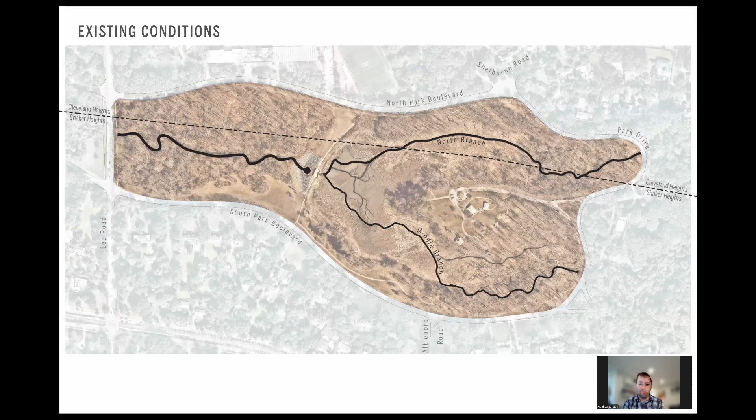On the next slide is our overall project tree inventory. This is new information we received early on in the 30% design process, and it's been an invaluable tool for us to take all of this data and start to manipulate our design to maximize saving of healthy mature trees, and to identify locations of invasive and dead trees on the project.

This pie chart on the bottom left identifies a series of tree species deployed throughout the park. A couple of the highlighted ones on the bottom right of your screen are identified there as well. Overall, about 3,000 trees were inventoried as part of this project.

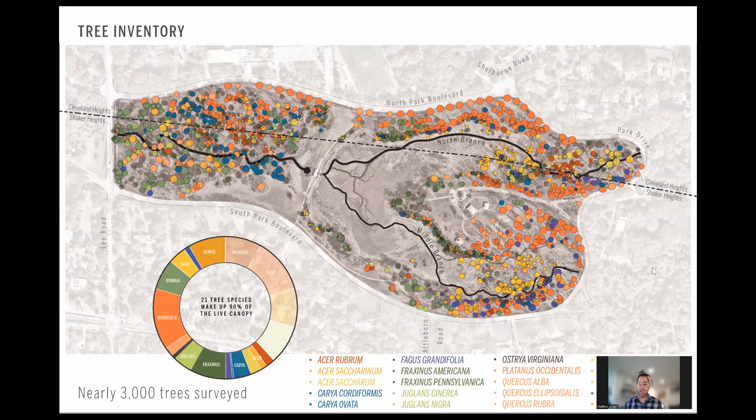We were also able to identify, with the tree inventory data, what we're calling legacy trees. Legacy trees account for just under 10% of all trees in the park. We've defined legacy trees as trees of good genus or species that are also larger than 36-inch diameter—really massive, majestic trees on the site. We want to make sure we're doing everything we can to protect these trees during and after construction.

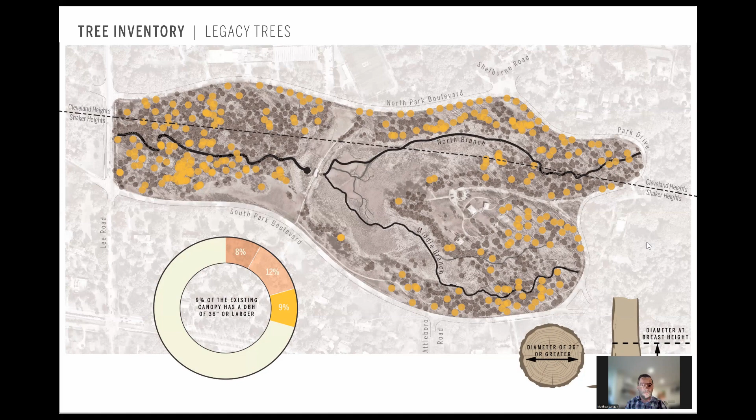Understanding the tree inventory and where all the important trees are, we've taken a pass at realigning the stream alignments to make sure we're protecting as many of those legacy trees as possible, while also aiming at some of the invasive trees so we can wipe out those invasive tree clusters as we're restoring the streams throughout the impoundment area.

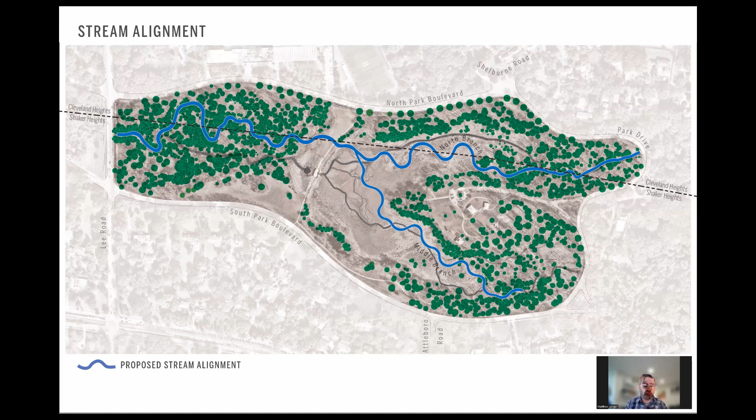To enable that stream restoration process, in the alignment highlighted here in blue, there's a vast area of earthwork that needs to be done. In this area highlighted in red, this is effectively the limit of regrading that has to happen on the project, because there are hundreds of thousands of cubic yards of sediment in the old lake bed.

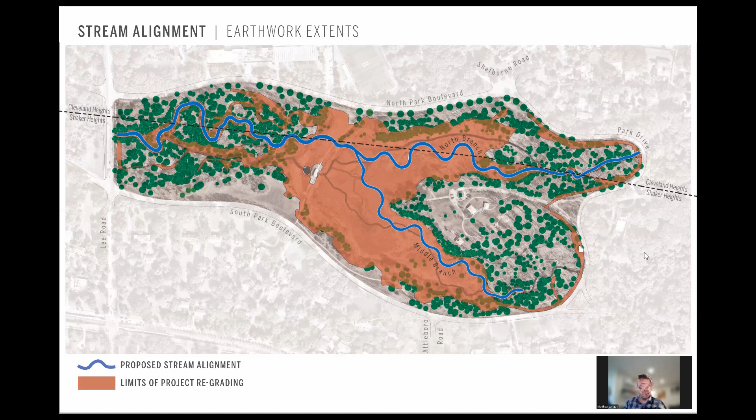There's also the earthen embankment of the old dam that has to be partially removed to allow the stream to pass through it down towards Lee Road. So you can see this is a pretty vast area, and it's going to require quite a bit of manipulation—it's also going to require a series of tree removals.

If you remember the slide showing the invasive or dead trees, most of those were along the edges of the old lake and in that downstream area. Our regrading opportunity here is to take advantage of removing a lot of that invasive plant material as part of the regrading efforts, and try to manipulate and get rid of that seed bank of invasive seed and roots along those edges of the old lake.

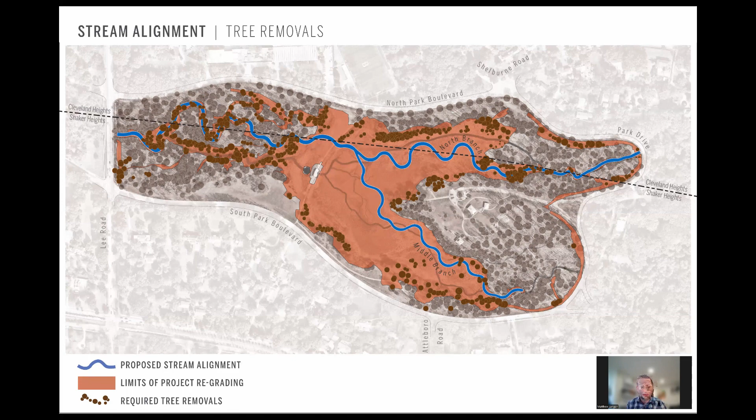That will allow us to take all of that sediment highlighted in the red zone, scoop it up, and relocate it on site to these areas now highlighted in orange. That will let us create a series of new landforms in the park that create high points, giving park users great views down into the floodplain in all directions. It'll also be an opportunity to create vertical circulation from the upland boulevards down and across the floodplain and back up the other side, reconnecting the two communities together.

So these landforms are going to be a mixture of soil that is relocated on the site, and sediment that has been amended and replaced as structural fill to enable the park circulation and park amenities you'll see in a little bit.

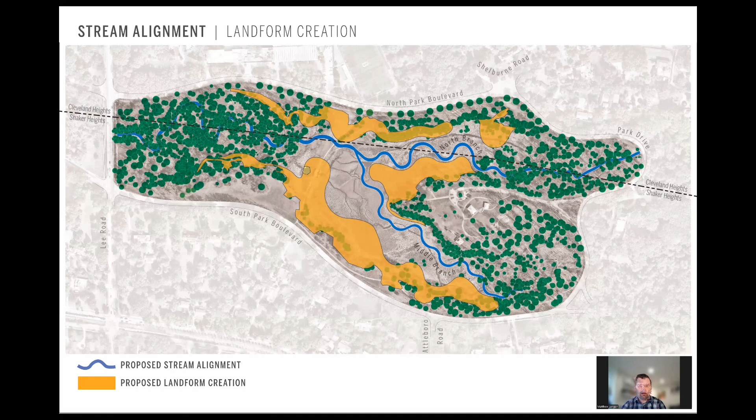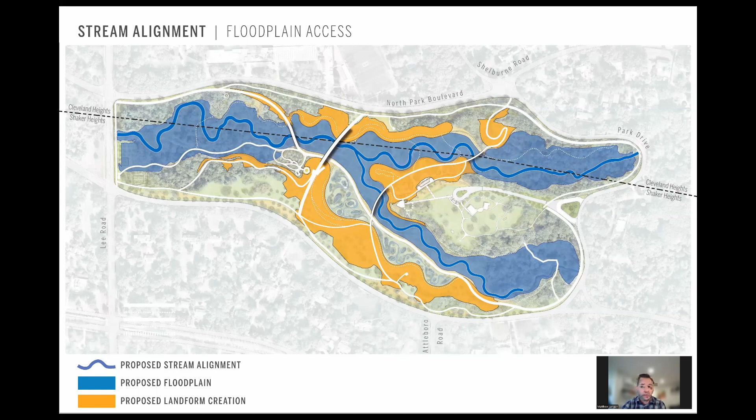The circulation highlighted here in white is exactly that—using these landforms to create the access we think will be necessary for a successful park.

That allowed us to create a hierarchy of potential park circulation throughout the park using a series of colored lines, identifying primary, secondary, and tertiary circulation. This means we want to create a variety of opportunities for park users to access and use the park in different ways for different experiences. The primary and secondary circulation will all be paved paths throughout the park, whereas the tertiary circulation will include things like lawn paths and dirt trails, similar to some of the trails used today inside the park.

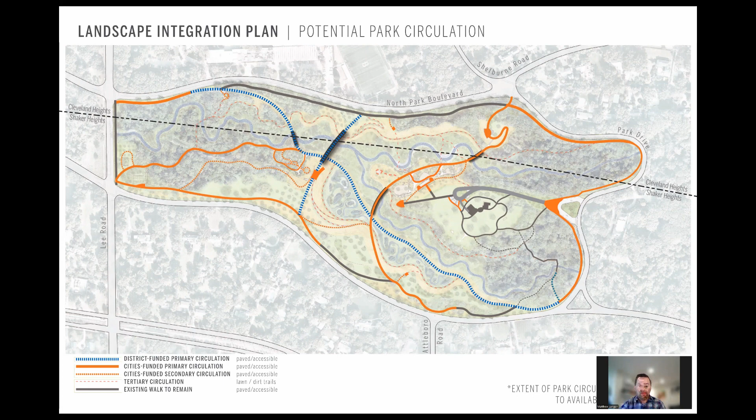And so that brings us to our landscape integration plan, which highlights all of those elements of stream function that we just talked about. But it also starts to illustrate how we've overlaid the circulation system and a whole range of park amenities on top of all of that regraded earth on the project. We're going to walk you through a little bit more about the park amenities, but before we do, we want to reiterate the point about how important stream function and park hydrology is to the project.

So we're going to dive into that now, and I'll call your attention to the north and middle branches of Doan Brook as they come through the park and confluence right in the middle of the park and then continue on downstream to Lee Road. You can see that generally the width of that stream is about 20 feet wide and is fairly continuous all the way down from Park Drive to Lee Road.

But as we start to look at what happens during a typical summer rain shower, you can see that the stream corridor gets a little bit wider and the stream comes up out of its banks and starts to spread out a little bit. You can also see a whole series of squiggly lines along the edges of the park. Those are a series of constructed wetlands that we'll talk more about in just a minute, but they also take on water from the adjacent neighborhoods, and I'll show you that in just a second. So if I toggle back and forth here for a second, you can see that even in a small summer rain shower, which is anything less than an inch of rain in a 24-hour period, really starts to change the way the stream looks, even after a small rain event.

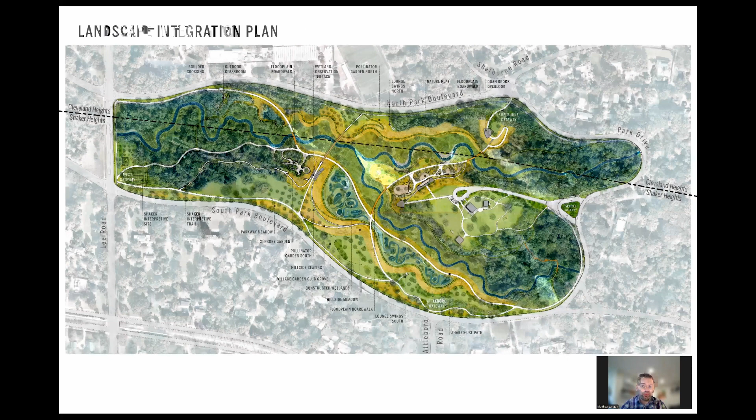And when we get larger rain events, the changes are much more dynamic. You'll see that here as I go forward to what we're calling a one-year storm event. A one-year storm event is just under 2 inches of rain in a 24-hour period. And what you can see here, again, if I toggle back and forth between a typical summer rain shower and a one-year storm, is a much broader stream corridor where that stream is accessing much more of the floodplain.

And this is all by design. This is intentionally designed to allow that water in the stream to come out of its banks and access this vast floodplain, to slow that water down and store that water as it's slowly draining westward under Lee Road and out towards Lake Erie. Again, on the edges, you can see a series of wetlands that are starting to get hydrated by storm events as well.

As we jump ahead to the 10-year storm, again, you could see the footprint of the floodplain swelling with more water. That water is moving nice and slow and is as shallow as possible, again by design, to make sure that we're slowing this water down as it's passing through the park site.

And then even in a 100-year storm event, which is the biggest storm event that we're designing for, you can see the entire floodplain has been submerged now, but the major park circulation, the arteries of circulation through the park, are still accessible, and our proposed boardwalks and bridges are still above the water level. Again, that's by design to ensure that the park can be used even during a major storm event like a 100-year storm.

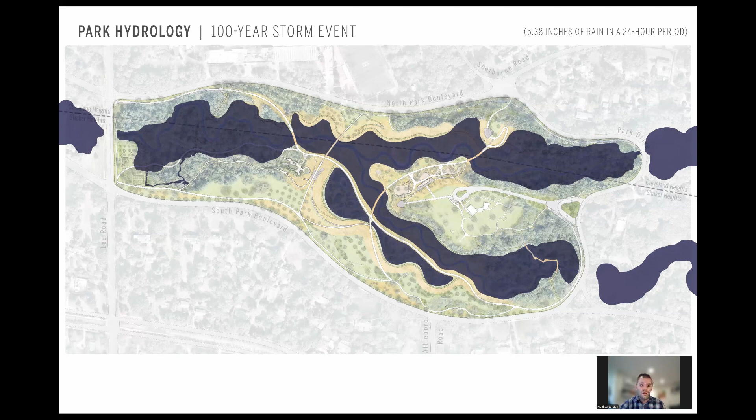And so to put that into perspective, here you can see a diagram of some of the major potential park circulation on the site. This is a bird's eye view, kind of hovering over Lee Road, looking east. You can see the Beaumont School off to the left there and South Park Boulevard off to the right.

Here you can see 3 of the main circulation spines through the park. The first one is the shared use path, the shared pedestrian and bicycle pathway that cuts diagonally right through the park.

There's also the mid-park crossing. The mid-park crossing is the footprint of the old sidewalk that took you across the dam between North and South Park Boulevard. That will be reconstructed, and a major piece of it, right where it says mid-park crossing there, will be a pedestrian bridge that continues to make that connection across the new stream corridor between North Park and South Park Boulevard.

And then in the background, you can see what we're calling the Attleboro-Shelburne Trail. The Attleboro-Shelburne Trail is a physical connection between the terminus of Attleboro Road along South Park down into the floodplain, across the floodplain, and back up to Shelburne Road on the Cleveland Heights side of the project.

What's exciting about this circulation network is that it will be open to the public even during major storm events, as you can see here. These trails are designed to stay high and dry, allowing floodwater from the stream to pass right underneath them as it continues its way out to Lake Erie.

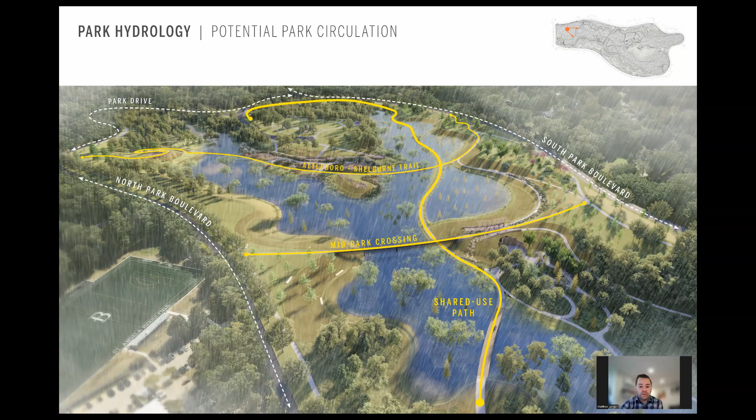You can also see on the right-hand side of the shared use path a series of lobed areas that are also taking on stormwater. That's one of our many constructed wetlands in the project, and we're going to talk about those now.

A major component of our park hydrology, which is separated almost entirely from the stream system, is a series of wetland filters we've been designing to intercept stormwater coming from the adjacent neighborhoods and filter it before it ultimately delivers filtered water back into the Doan Brook corridor.

There are 4 major wetland systems currently being designed. Wetland 1, on the center bottom of the slide, has a drainage area of nearly 90 acres of Shaker Heights, continuing south to Woodland Road and east to Eaton Road. All that stormwater collected from the streets currently outlets directly into the middle branch of Doan Brook today. We're going to intercept that water as it comes into the park site and put it into this 3-lobed wetland system.

A little further west along South Park Boulevard is Wetland 2, with almost a 10-acre drainage area—mostly the properties along South Park Boulevard just west of Attleboro Road. All that stormwater will be captured into a small wetland system highlighted in orange on the far west side of the site, letting that water get filtered before it makes its way back into Doan Brook.

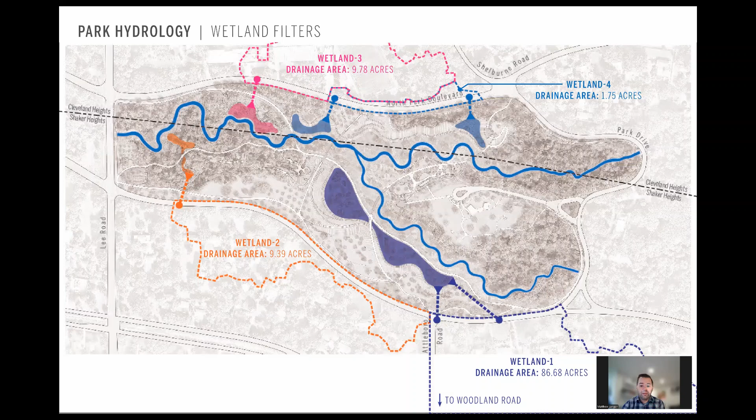To give you a sense of what this might look like in the park, we're going to look at Wetland 1, that series of 3 lobes along South Park Boulevard. You can see that here on the screen, along with the shared use path dividing Wetland 1 from the middle branch of Doan Brook, that line coming through.

This has been designed as an entirely separate water system from the Doan Brook system, intentionally, because we want to take all the stormwater coming off the streets and run it through this wetland system to filter that water out before we ultimately bring it back to Doan Brook.

We're going to look at those same storm events we looked at earlier in plan view and see how they start to hydrate these wetlands. During a typical summer rain shower—about 1 inch of rain in a 24-hour period—you can see the wetland starts to get hydrated in this long swale, which is normally dry, but after a rain event the water starts to flow through and deliver water into all the lobes of the wetland.

As we jump ahead to the 1-year storm event, you can see some of the low areas of the wetlands start to get inundated with small pools and pockets of water.

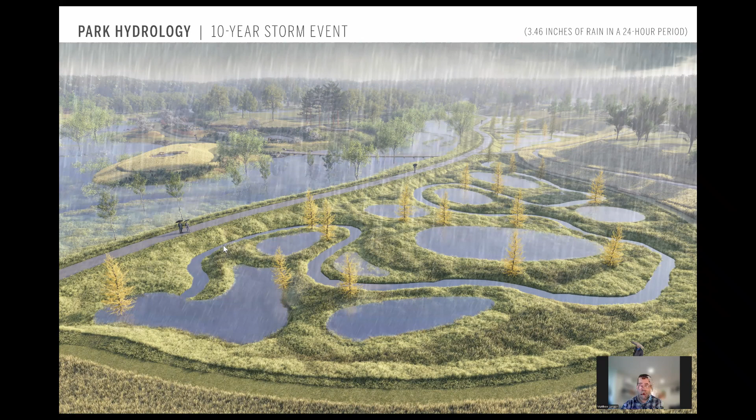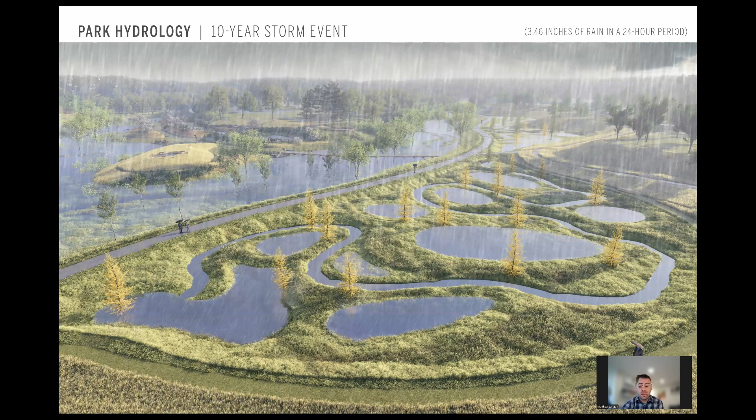In a larger 10-year storm event, those little pockets of water grow into these big oblong pools, which take that water and really let it sit there and get filtered before it starts to recede back into that swale and ultimately out into Doan Brook.

In the 100-year storm event, the entire wetland system is completely inundated, and that water is detained and filtered before going through a controlled outlet underneath the shared use path back into Doan Brook. This allows storm water coming through the Doan Brook system to pass through the culvert under Lee Road and down towards the nature center and beyond, before we outlet the water from the wetland system back into Doan Brook.

Coming back to the landscape integration plan, you can see how we've designed the park to function hydrologically as our primary objective, but also use the stream restoration process and landform creation to set the table for a whole lot of other things, including circulation and park amenities.

With that, I'm going to turn it over to my colleague, Glen Valentine, to walk you through the different types of landscapes you'll be able to observe and encounter in the park through our circulation network. Glen will take you on a tour of all the park amenities we've designed into the project to date.

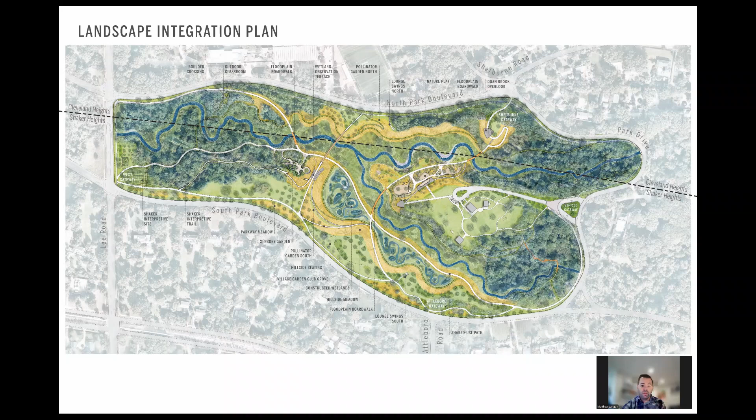Thanks, Matt, for that explanation of hydrology and circulation in the park and how we've manipulated all of that landform and sediment to make those two systems function.

Flowing up from that, we're designing a series of meadows which transition from the stream floodplain and stream valley to the parklands along each side of the parkway. That whole yellow area you see are those sloping meadows of the hillsides.

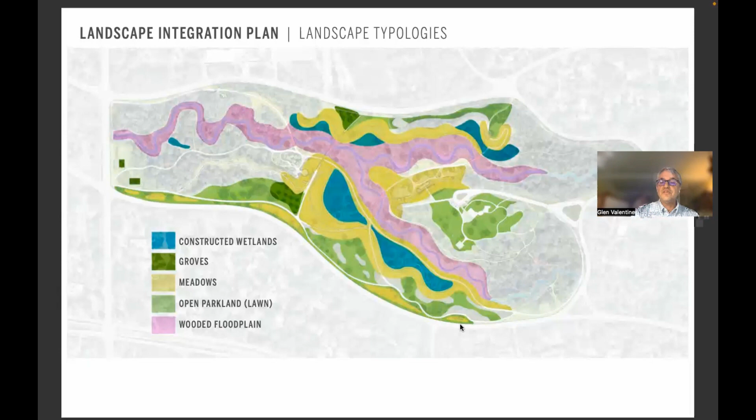Up at the top, we're designing new open parklands along the north and south sides of the park using large collections of native species, both in canopy trees, shrubs, and ground covers. In some areas along South Park in particular, we're thinking of using meadows along that edge too to reduce the amount of mowing needed in that landscape.

We're going to take a look at each one of these environments in turn as we tour through the park, and we'll look at the amenities as well. But to start out, we're going to look at the restored stream corridor itself.

It's really designed to accommodate all of those different activities through the middle of the park and provides a way for most people to experience the restored water system along almost its entire length, whether you walk, stroll, or go along it in any manner you choose.

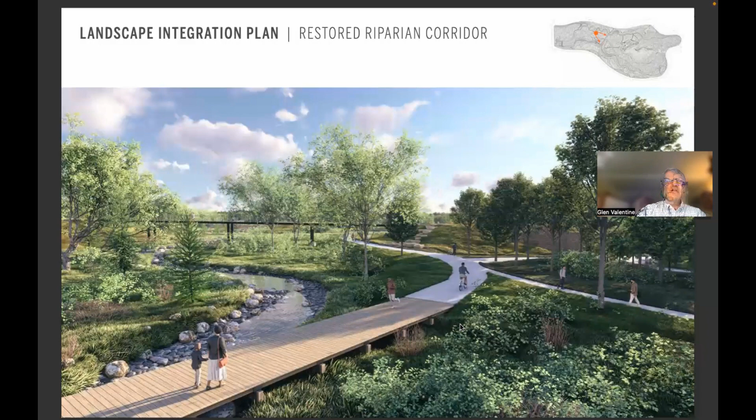Now we're going to continue our tour through the restored stream corridor.

We've designed a series of different ways for people to interact with the restored brook itself. This is one of the things we heard most loudly in our public engagements throughout the process of designing this park: that people wanted to get down to the level of the water and really engage with the restored brook.

Here you can see the outside meander of a portion of the Doan Brook, where the armoring, these boulders along that edge, has been manipulated to create a series of informal steps to allow people to get down from the level of the adjacent pathways to the level of the water itself. This particular spot, shown on the key plan, is along the north branch, right next to the area of nature play, which we'll get into later in this presentation.

And it allows parents and kids to get down to the level of the water. We've also designed other ways for people to interact with the brook.

You can see in the foreground of this image a child walking across an informal bridge made out of stepping stones or boulders crossing the brook, creating the beginning of one of many riffles throughout the restored Doan Brook. On the inside meander, you can see a shelf of gravel accessible by this series of stepping stones.

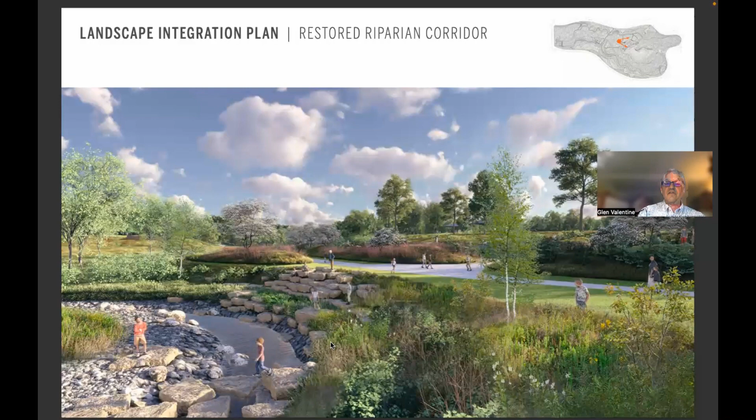The other thing I want to talk about here is the element of the planting itself and how it's going to change over time. As Matt mentioned, the hydrology of the park is very dynamic, and many of the spaces will change with each storm that comes through the created wetlands and through the floodplain of the restored Doan Brook.

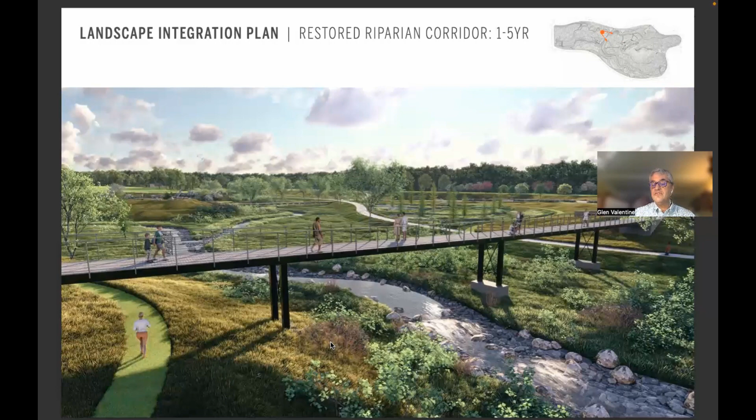But that's going to change with time. Here we've gone fast forward into the future 20 years, and you can see that the shrub layer has grown up to about 10 or 12 feet high, which will be its mature height. It will be quite dense at this stage and rich, creating a lot of habitats for birds and other animals along the length of the corridor.

You can also see pioneer tree species jumping up here - trembling aspen, cottonwoods, willows, birches, all kinds of fast-growing pioneer trees. They'll reach up to a height of about 35 feet by this time, really transforming the experience from the bridge and from the ground, and the whole feeling of the restored Doan Brook.

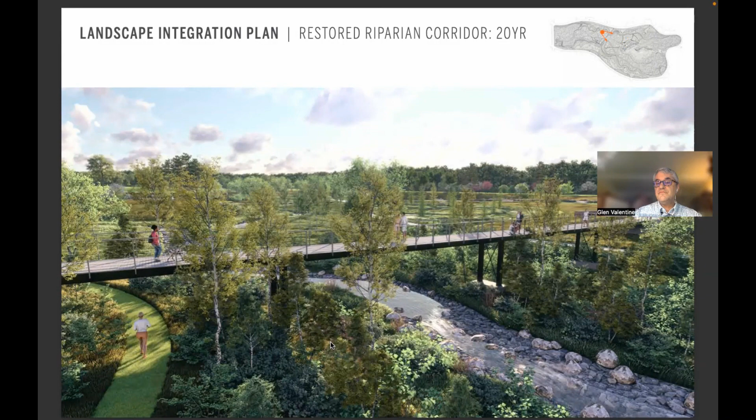You can see it transforming towards more of a woodland character as opposed to an open kind of marshland. We're going to jump forward again. Here you see what this portion of the park might look like 40 years in the future - you can see how much it's transformed. The canopy trees here have reached up above those pioneer species and closed a canopy over the stream corridor itself.

That will create a new level of shade and will outcompete many of those pioneer species, those fast-growing trees, and those initial sun-loving shrub communities will diminish. Some will go away completely, and you'll have a transformed ground plane of native perennials and ferns, as you see here, and the open kind of views you have from the ground plane will be restored in a way, but in a very new kind of environment below the canopy of trees.

You can see here the hardwood trees have reached up into the sky. These are what we imagine might be shagbark hickory on the left or sycamores on the right. And you can see the experience from the bridge.

This is the same view, just transformed by time, where you have these open long views to the east and the west. Now you're still going to have views down into the stream valley, but your experience is going to be completely transformed into one where walking on this bridge will be like walking on a canopy walk through the tops of these trees.

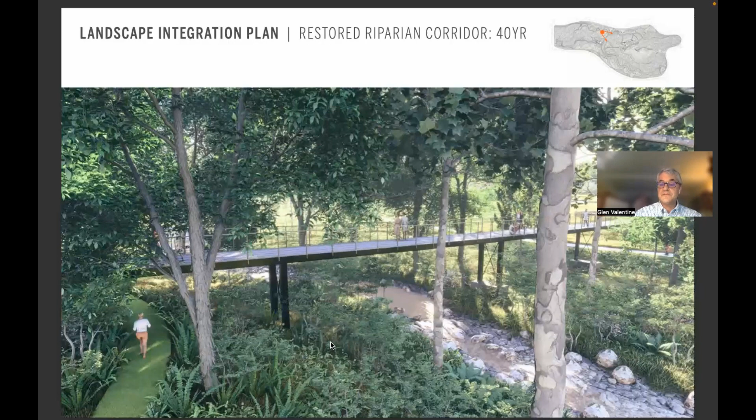Now we're going to take a look at that circulation system that Matt was mentioning earlier, describing the system throughout the park, and look at the gateways as they meet the adjacent communities along both the north side and the south side of the park.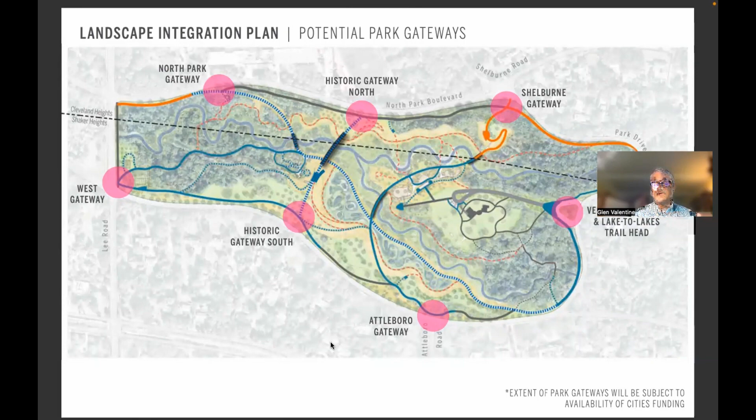As Matt mentioned, there's comprehensive circulation through the park that is designed to function even in the largest storm events. These pink dots around the perimeter are the potential gateways where those circulation systems integrate with the adjacent communities. Each one has been designed with a suite of amenities, including benches, signage, trash receptacles, and bike racks, to be as welcoming and inviting as possible to all the communities surrounding the restored brook and the new park space.

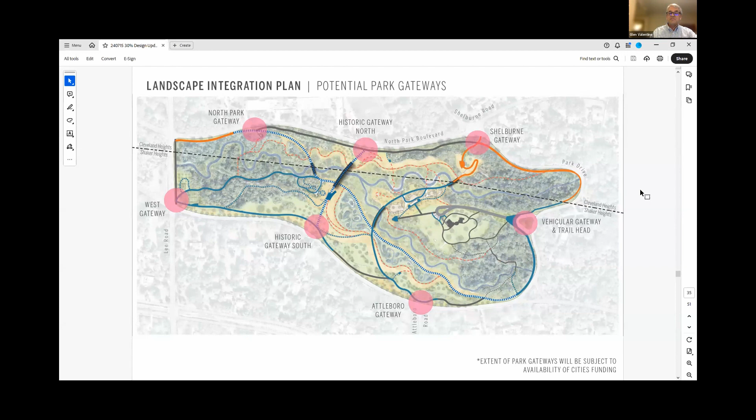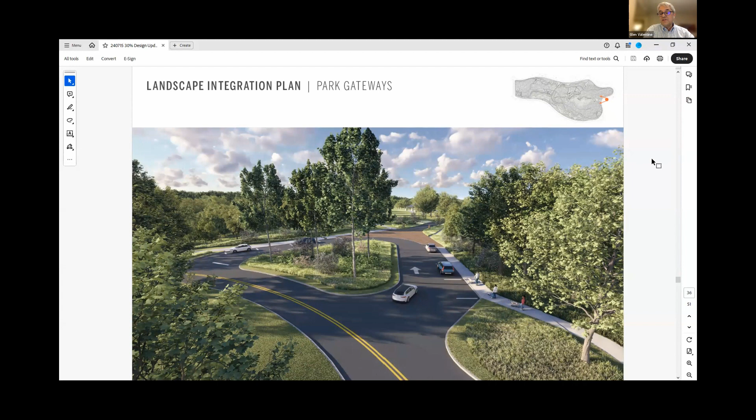We're going to look at a couple of these gateways now. Here's the transformation of the existing entry to Horseshoe Lake Park. We've envisioned the native planting stretching out, reaching around this existing space, enveloping people coming to the park and creating a clear separation between pedestrian and vehicular environments. You can see a new plaza formed in the middle center of this slide. Those brown pavers will have a low mountable curb to make it very clear where the cars stop and where the pedestrian strolling experience begins through the existing Horseshoe Lake Park.

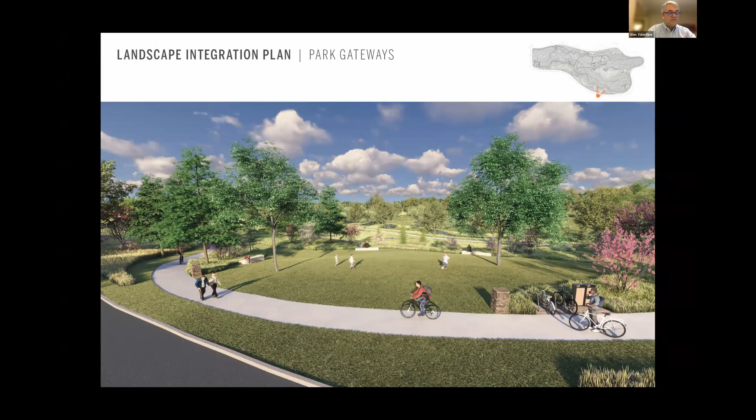Here's a more typical kind of gateway that you're going to experience around the perimeter of the park. This is at the intersection of Attleboro and South Park Boulevard, shown by that little red arrow on the bottom part of the key plan. Here you see some of the key elements: bike racks, trash receptacles, two little entry piers where we're going to have signage about the history and identity of the park, and a series of benches throughout the space.

The one key thing about each of these gateways is that you're going to open up vistas into the park, encouraging people to come in and explore the center of the park, which has never been open to them before. We're envisioning these as little mini parks for informal gatherings and play for all of the communities around the Doan Brook Park.

Next, we're going to take a look at the integration of potential park amenities. We're going to take a tour of these amenities, starting from the east and moving to the west. These are the amenities that really came to the fore in our previous public engagement activities, where there was a voting and design exercise to decide which of these were most important to the design of the park.

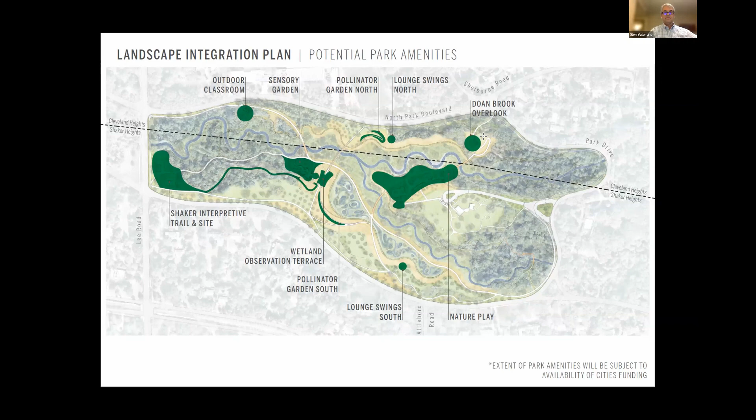We're going to start with the Doan Brook Overlook. This is located at the highest point in the park, a new overlook built on one of these promontories that Matt was talking about, with the sediment stored here giving long views along the North Branch looking to the west. In the distance, you'll be able to see nature play from this location. The low seat walls here relate to the historic masonry walls that exist right now in Horseshoe Lake Park. We envision hillside, informal seating, kind of an outdoor amphitheater that can be used for gatherings and maybe even impromptu community performances at this location.

At the center of the park, along the North Branch, looking at that little red arrow for orientation, this is an overview of the nature play, one of the largest amenities in the restored park. You can see here that it's divided into three distinct sections or areas of play.

On the far left-hand side will be an area for swings enclosed by planted mounds. In the middle of nature play will be an area with climbing structures. Further to the east, or the right-hand side, there'll be an area for slides set into the hillside. You can also see here how the North Branch of the Doan Brook intersects this nature play area.

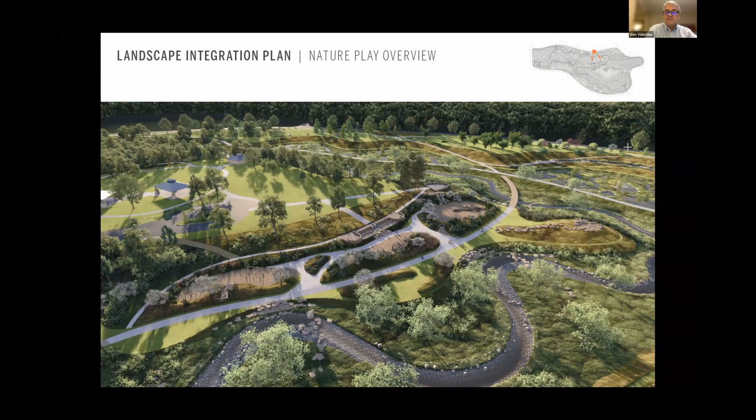As I discussed earlier, we really want this to be a place for engagement with the restored brook. We see these two places where the meanders touch nature play as a critical part of the nature play experience in the park.

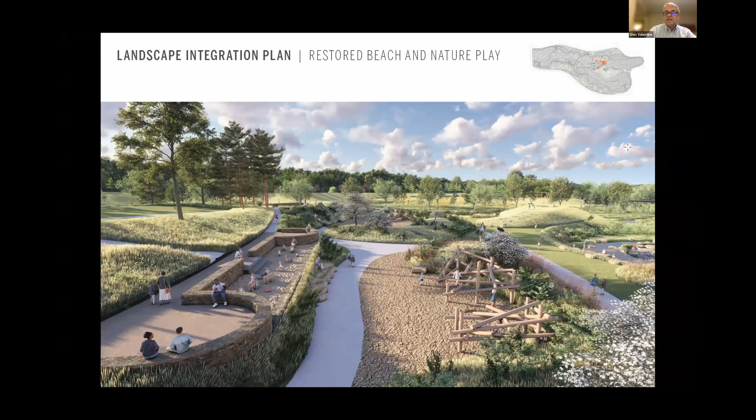Here we are zooming in, you can see a little more detail of the nature play design area. You can see those mounds I mentioned, heavily planted to create separation of the distinct areas within nature play. This is the central area, with climbing structures envisioned from all natural materials on the right. On the left, the area known as the beach has been transformed into an area for sand play, really for the youngest kids and visitors to this part of the park.

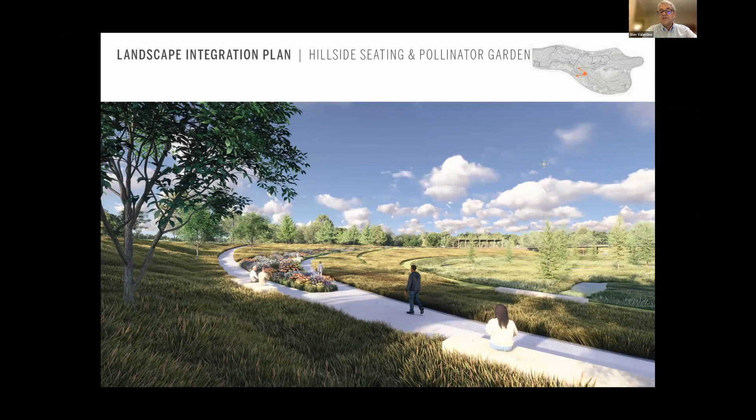And here you see the pollinator garden in the center of the image with those flowers in bloom, running along the central path of this sloping meadow hillside area. In the background, in the center of the screen, you can see an arbor up on the hillside—that's an overlook arbor, which we'll take a look at in just a second.

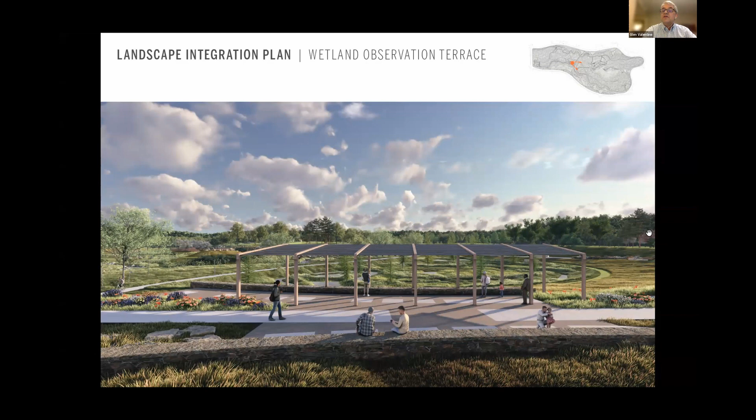So here's that arbor. You're up on the landform that was the former dam, close to the center, right before the bridge—you can see where that is from the red arrow on the key plan above. This is looking back over the constructed wetland from above, and you can see we've created a welcoming, pleasant place for people to sit and watch that space change with different storm events and seasons. It also encourages views looking east into the constructed wetland and to the west as well, with that seat wall in front. This is the launching point for the Shaker Interpretive Trail, which will lead to the western half of the site.

Now going down below that overlook arbor and pavilion on the landform, below the masonry of the historic stilling pool, which you can see in the center right of this image, this is a sensory garden. We envision this area as a series of meandering pathways creating a series of outdoor rooms designed to use native plants to heighten people's senses and experiences of nature.

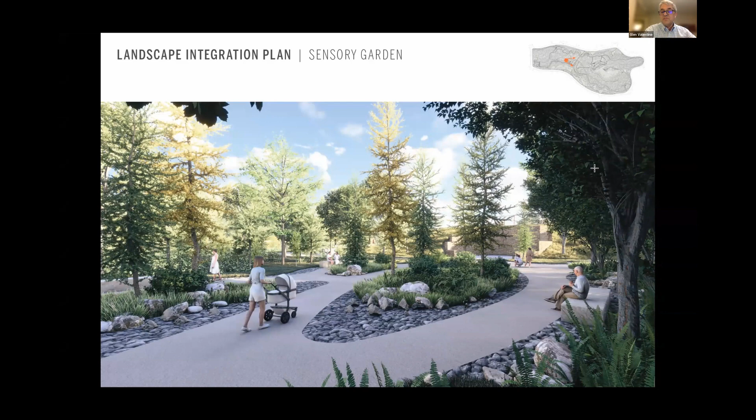We envision some spaces here as rooms filled with or surrounded by trembling aspens, filled with the sound of fluttering leaves. Other rooms in this sensory garden may be surrounded by groves of native azaleas, which have wonderful scent in the spring. Others we want to be more tactile, planted closely with shagbark hickory and sycamore, where you get the tactile experience of touching the unique bark of those trees as you pass through that room or outdoor space.

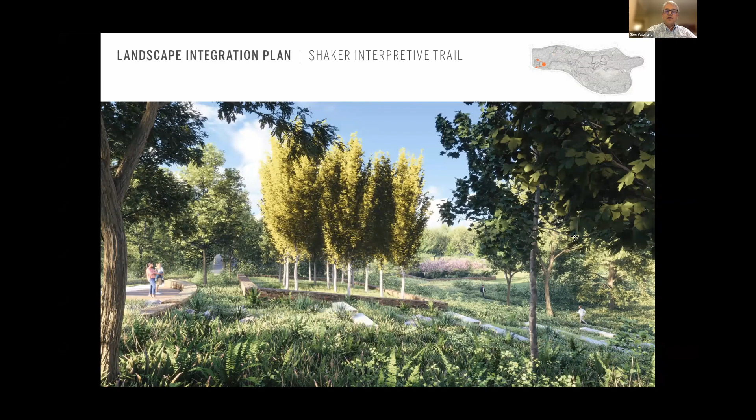Next, and finally, getting all the way to the western end of the park, right at the edge of Lee Road, we have the Shaker Interpretive Trail. Here you can see two rectangles outlined by low seat walls. Those are the foundation locations of the original Shaker woolen mill on the left-hand side and the blacksmith shop that was directly on Lee Road.

We're going to reuse the historic masonry from parts of the dam that are being removed to build these foundations and mark these historic structures. And along with interpretive signage, we're going to plant these areas with trees and other plants that were here before the area was industrialized and transformed by that settlement, and explain how that ecology has changed.

And then there's also a mill race with water running along here. As some of you may have experienced, the old mill race still sometimes captures water. We're going to transform that into a linear rain garden that will spill down the hillside through a series of weirs, in the same location where the old mill used to have water coming down the hillside to power the works of the woolen mill.

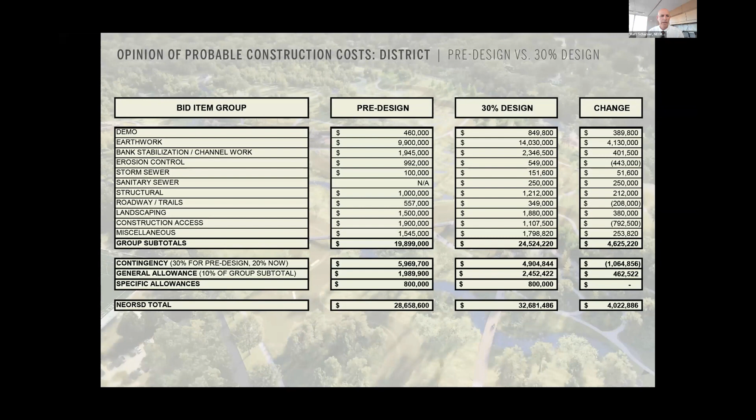Really, if you look at row 2, the earthwork row, that's where a lot of the costs will be borne on the project. It's a 60-acre space, and the district is going to touch about 26, 27 acres of that with earthwork. So that's going to be a lot of the cost, and you can see our costs had increased there.

We'll continue to refine these costs as we look to deploy different strategies for the lake bed sediments and how we manage and move those sediments around the site to create those different landforms that Glenn and Matt had described, and hopefully reduce our need to import different soils and export some of those lake bed sediments off-site. So we'll continue to refine that as we move forward in the project.

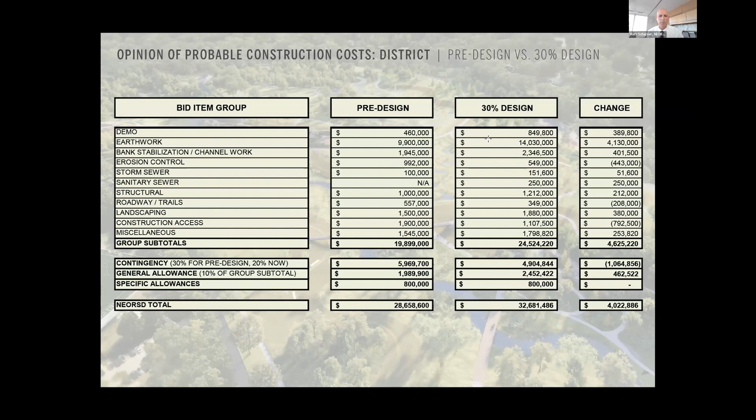We're potentially implementing a far greater amount of trails within this landscape transformation, and those amenities that Glenn described through the renderings also carry a significant cost. We'll continue to look at these amenities and cost components, refine those, and hopefully drive down costs as we move to the 60, 90, and 100% design stages. So that just gives you a sense of where we're at in terms of costs.

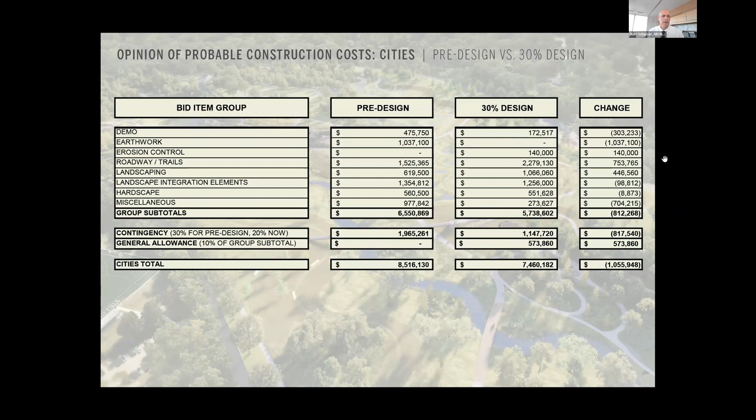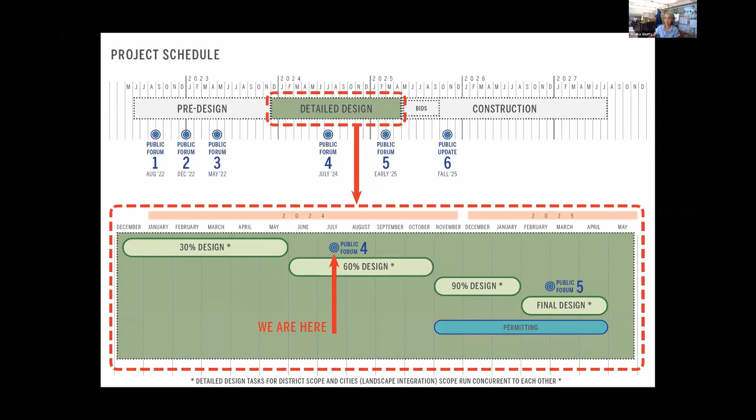Okay, thanks, Matt. We have a couple more questions that came in. We have a question here that says, who will be responsible for long-term stewardship of the area, continual removal of invasives, et cetera? And then also, is there going to be any dense areas of planting containing shrubs, understory trees, et cetera?

So great questions. Maintenance and long-term stewardship is certainly on the forefront of our minds as we design this project. As I mentioned before, there's about 27 acres of floodplain, riparian corridor, those areas closest to the stream that the sewer district will be maintaining into the future as part of our regional stormwater management program, which will include invasive species management. We know that there's a tremendous amount of invasive species already within the park space.

We're devising different strategies to address that and deploy measures that we might actually deploy early on before the project starts. So we're still in discussions about that, but we know that as the project progresses, we'll be able to address a lot of those invasive species, and then the work will continue once construction is complete to ensure that the investment we're making in all the new native species is not lost or overtaken by invasives. So I think we're well positioned to do that.

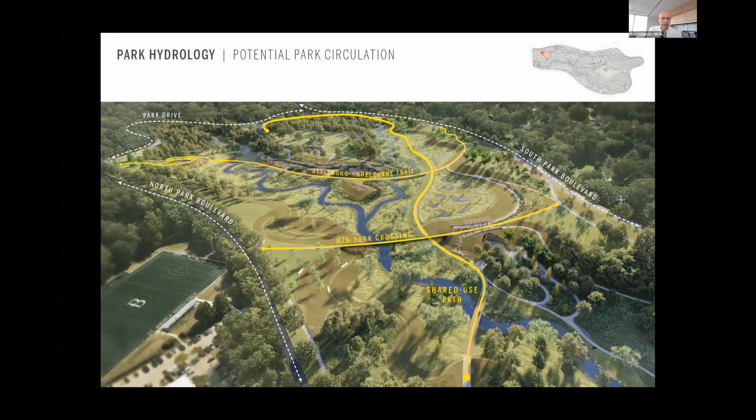And I didn't answer the question about the plantings in terms of density. There'll definitely be areas of dense plantings. We have a lot of different landscape forms that you can see here in this slide. So there'll certainly be some areas of dense plantings, and there'll be areas of more open plantings. But the site's really being designed to evolve over time, and that's what we hope to show with the renderings of the 5-year, the 20-year, and then the 40-year vegetation growth.

So as the site matures, it will transform. Some areas will transform from initially being just shrubby growth areas to more mature trees, and then full tree canopy, certainly within the corridor of the north branch, the middle branch, and then the main stem as it moves down towards Lee Road. So that's our goal, is to get to that overarching tree canopy. So we'll have different planting areas for certain.

Thanks, Matt. Could you discuss the tree removal again, please?

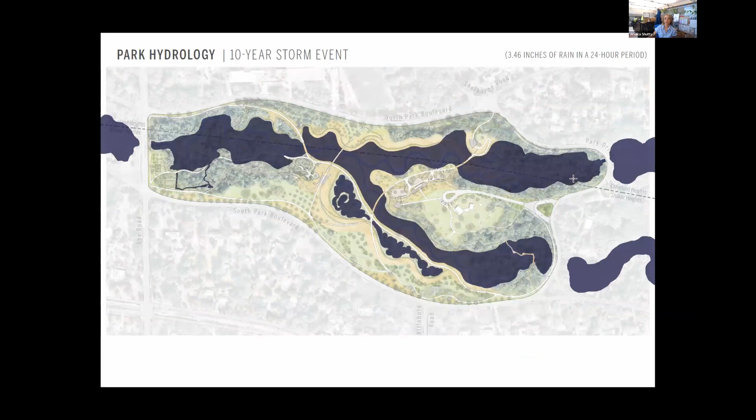Especially the shagbark hickory is tolerant of wet sites. Could you kind of explain that for one of the questions that came in?

I think we've been advantageous in terms of understanding the trees that exist on site and the amount of invasives. Our graphics illustrate that we'll be able to remove a lot of the invasive species through the earthwork that will be required. The question about shagbark hickory is that it's really tolerant of upland environments, and there are hickories throughout the site, so we want to make sure we can protect those hickories and introduce new planting areas for additional hickories throughout the site where it's appropriate.

They're much more dominant in the western half of the site. That's where the hickories are really concentrated, and it's a very distinctive tree within the park. We want to play up the distinction between the eastern and western half of the park, so we're going to try and supplement those communities of hickories, particularly on the western half of the site.

Great, thank you, guys. Is there any place that's an easier way to cross from South Park to the North Park where the dam was?

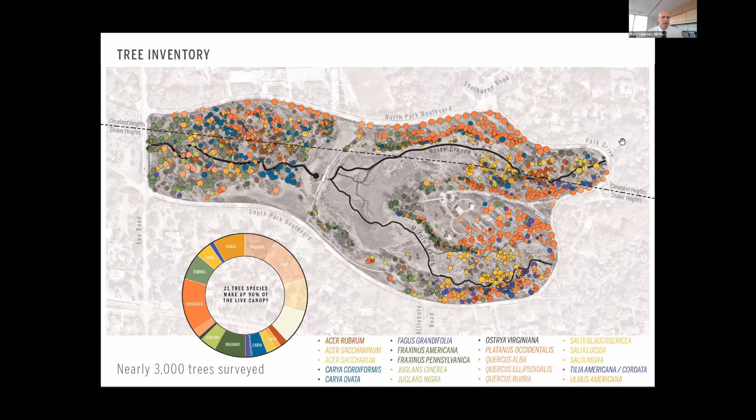Based on our design work, and there's a lot of engineering, hydraulics, and hydrology understanding that went into it, in terms of understanding the velocities of the north branch and the middle branch, and the shear stresses they bring through the corridor, we want to make sure we create a stable stream corridor. That's first and foremost in terms of managing the regional stormwater system throughout the park space. So the earthen embankment, which is the dam today, is the most ideal location we determined to confluence both the north branch and middle branch.

Slightly repositioned, but that allows us to take advantage to move the downstream portion, the main stem of Doan Brook, back into its historic channel, which should be a more stable channel for Doan Brook into the future. It also replaces what has been the traditional connectivity between Cleveland Heights and Shaker Heights in terms of the North Park Boulevard and South Park Boulevard connection.

Thanks, Matt. Next question is kind of twofold. How much grassy area will require mowing? And would a structure for shade be made someplace, rather than the open structures that folks have seen in the pictures today?

I can answer some of that, Matt, and you can chime in. The structure that is going to be near the bridge at the Mid-Park crossing is really going to be designed for shade. Even though it looks somewhat open in the renderings right now, it's under transformation as we continue to design it, and it will very much be designed for shade in that particular location.

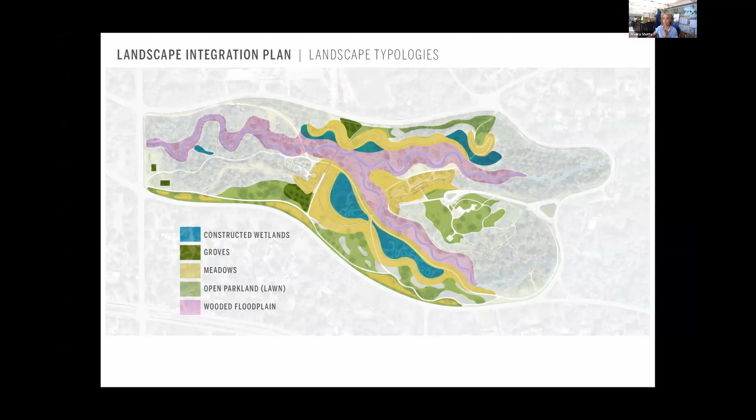Thank you. There was a question asked earlier: will there be guardrails on the boardwalk over the marsh? If you guys could maybe, Glenn, take that one. Sure.

There are 3 different boardwalks crossing over the restored Doan Brook: one on the north branch, one on the middle branch, and one where they're combined in the western half of the site. For 2 of them, on the middle branch and the combined Doan Brook, we're not requiring guardrails, since we're designing those to not have a fall height hazard. The one on the north branch is trickier because we're dealing with quick transitions to steep grades there to get up the hillside to Shelburne, to that overlook. But our strong desire is to not have guardrails there either—it'll be low enough to the level of the water that they won't be required. That's our goal, and I think we'll achieve it as we move into 60% design and refine it further.

Thanks, Glenn. So the question was asked: climate change is likely to substantially heat the park. Will tree density be enough to provide shelter and cool the park?

That's certainly our goal, because ultimately we want to improve the water quality of Doan Brook as much as we can, and one of the best ways to do that is to get a canopy over Doan Brook. There will be a lot of landscape transformation and opportunities for new tree planting, so we're going to capitalize on that wherever possible, wherever it makes sense with the new landform creations, to maximize our tree footprint and ultimately the canopy that helps cool this local environment.

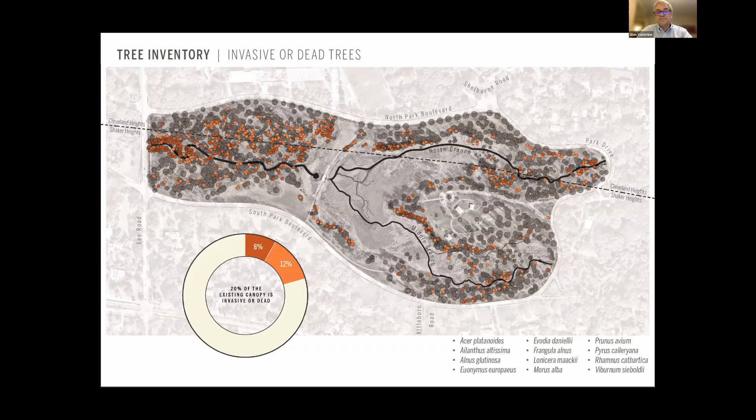Thank you, Glenn. Matt Sharber, if you could take this next question for me, please: can you talk about where we stand with the legal challenges to the removal of the dam and restoration of Doan Brook?

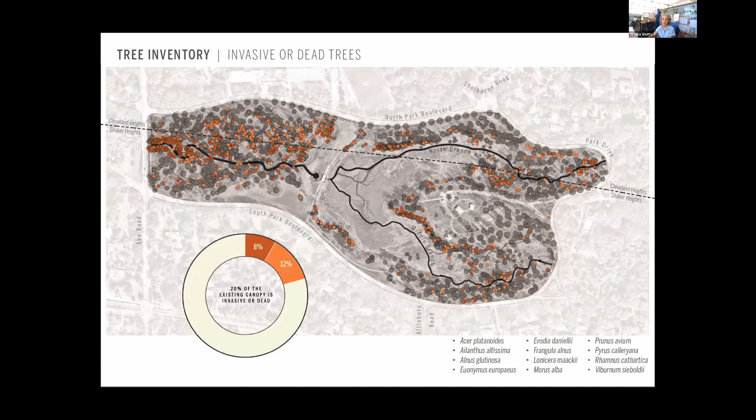Sure. There have been a couple of legal challenges to the project. The first was a taxpayer suit brought against the cities of Shaker Heights and Cleveland Heights, filed with the Cuyahoga County Court of Common Pleas, which was dismissed by the judge in that case. That suit was then appealed to the 8th District Court of Appeals and is currently awaiting the panel of judges there for their decision. Then a similar suit was brought against the Northeast Ohio Regional Sewer District for similar items, also filed with the Cuyahoga County Court of Common Pleas, and that judge has recently ruled and dismissed that case as well. So that is where that case currently stands.